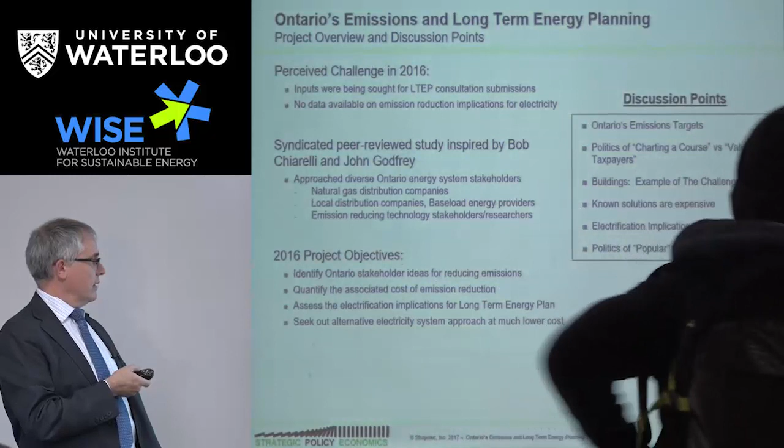The project objectives were to figure out what are the ideas for emission reductions, quantify what that cost would be in order to implement them, how much electricity do you need to actually address them, because there's conversion and fuel switching going on, and then what are the approaches that can be considered for the electricity system design as a whole that would reduce the cost significantly. So that was the objective of the project.

So what I'm going to talk about here is an overview on the emission targets, the politics of what was set out a year or so ago, and then we'll look at a couple of examples on buildings, and also throw some transportation ones in there just to describe why this is hard. Talk about the costs, talk about the electricity, and talk about what is the framework under which they're going to decide all this stuff, which when the LTEP comes out, I hear shortly, we'll know what they did with all these ideas.

Okay. Can everyone hear me? Yeah? A little louder? Okay.

Okay, so the first overview is the emissions challenge. I don't know how many people are up on the climate file, but we have legislated the emission reduction targets in Ontario. So the number I focused on is 37% below 1990 levels by 2030.

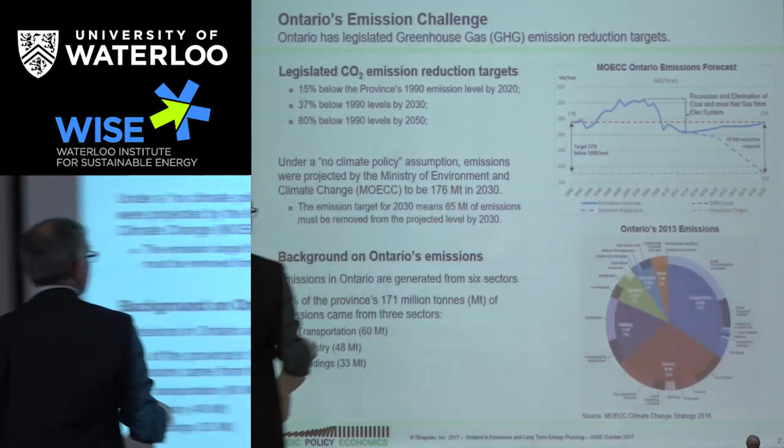The legislated part is important because we actually have to do it, or there'll be issues. So under a no climate policy assumption, that's the top blue line. That's what you get - 176 megatons.

When we look at the composition of emissions in Ontario, there are three main areas that matter - the big pieces of the pie. We've got buildings, which is mostly heating. Then industry, and transportation, which splits into cars and trucks, plus a lot of off-road items as well. So that's the challenge we have to deal with.

There's confusion because the climate guys and the energy guys aren't necessarily talking, and the Ministry of Finance guys weren't talking with them either. We came up with this cap and trade notion - I've labeled it charting a course versus value to taxpayers. Charting a course is important; someone's got to take leadership. We do have a climate problem, you've got to take a step forward. I think it's really good that people are trying to do that stuff, but you've got to keep an eye on the cost.

Why am I talking about this? The Auditor General says you're really just putting up a show that's going to allow you to say you did something. And what does that mean? That came about from the ministry's financial assessment of the cap and trade program.

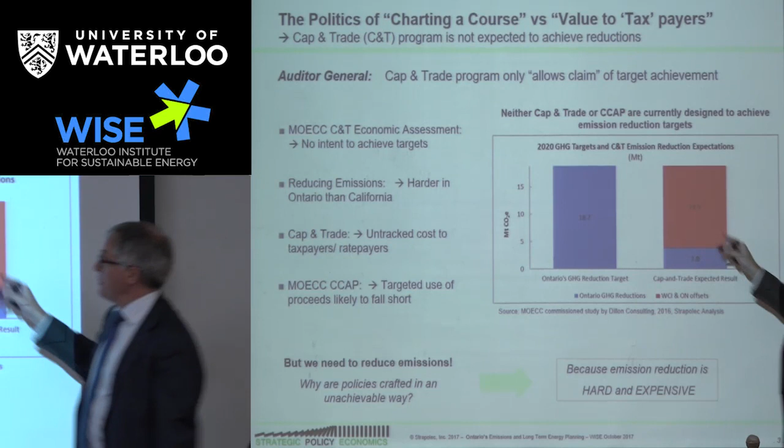We have to get rid of 18 megatons of emissions by 2020. They put the cap and trade program in, and figure we'll actually get 3.8 megatons of emissions out of the programs they're contemplating. The other 14.9 they're going to have to buy from California - so they've already set up that we're just going to send money out of the province. But they want to get started, right? That's why these kinds of comments come about - they're not signing up to actually achieve the changes.

So why would they set this up? The reason is it's really hard and it's really expensive, and when you're a politician you don't like either of those. But they're still taking leadership, which is important for the province.

This is just a list of all the people we consulted or whose material we reviewed in order to get ideas - let's skip on over that. And we'll get into what does 'hard' mean.

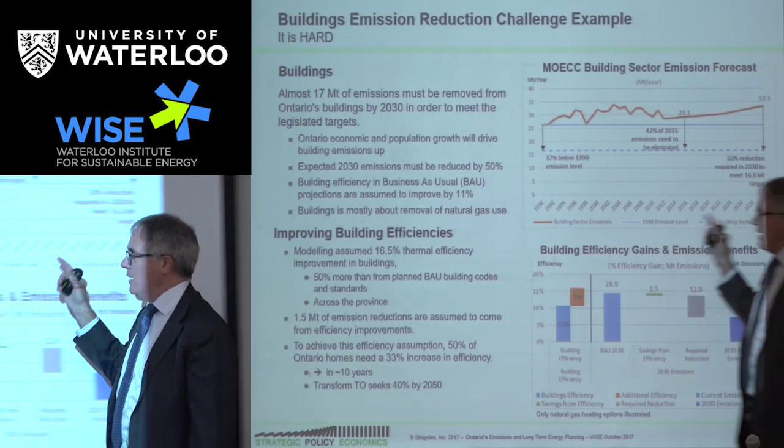When we start talking about hard, buildings is an example. For the building sector, we've got the same idea of growing emissions if we don't do anything. By 2030, that means a 50% reduction of emissions - so 50% of the houses have to lose their emissions, or half the houses have to lose half their emissions, and so on. There's math around that.

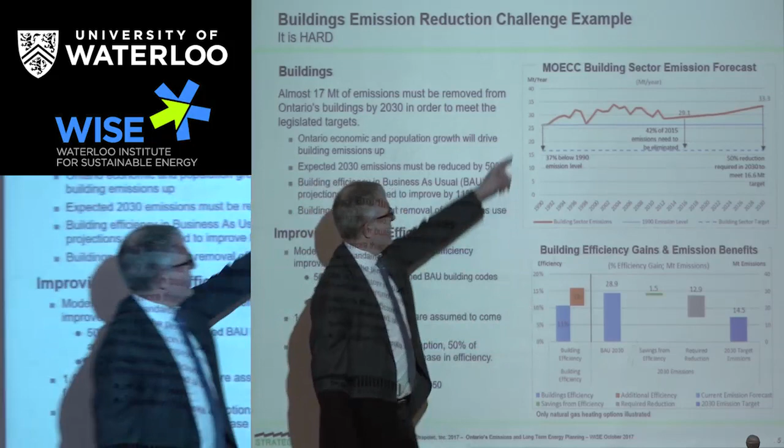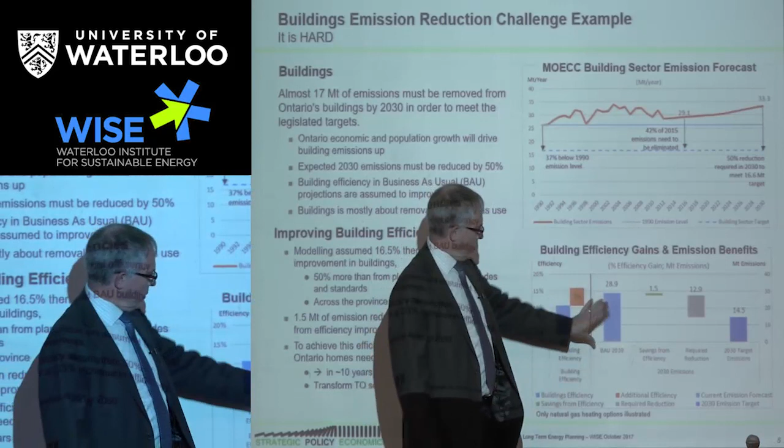Using the technologies and regulations they contemplate, we're left with a number of emissions we have to address. The baseline emissions for 2030 - you take out this little bit because that stuff's already embedded in the forecast - and then we're left with that much emissions we've got to get rid of.

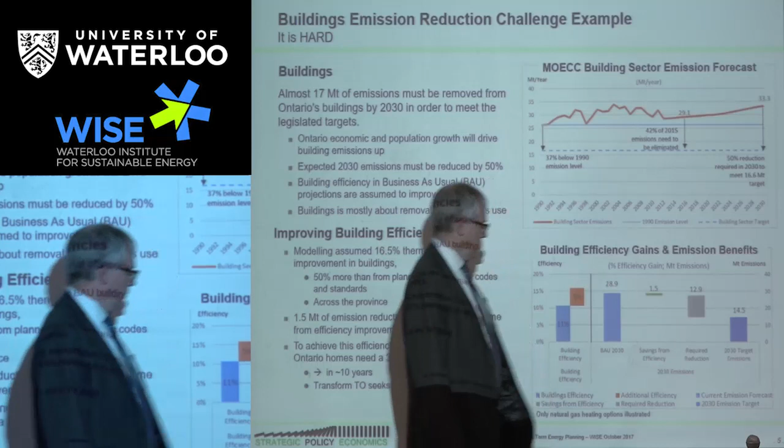To achieve that, we need 50% of the homes to have a 33% increase in efficiency, over 10 years - and that's just to get this sliver. So it's hard to deal with that, and then we're left with those kinds of emissions to come out in the end.

Okay, at a high level, it's expensive. The price tag I put on it is $27 billion per year. To put that in perspective, we've had a lot of commotion in Ontario in the last year or so around the cost of electricity. The dollar figure that has caused all that commotion is $3 billion per year. That's the cost that got increased, the 25% the government just took out, $3 billion. So this is $27 billion per year.

The cost of undertaking climate change by 2030 is not a small number, so we actually want to be kind of smart about it. So how do we frame that up? We've got three different examples.

One, if we assume the $27 billion is the total cost, it's coming out of an assumption of $170 per megawatt hour electricity, which is the average price they're expecting for new generation they'd have to build. We've got two components, which I'm going to go into a little later. One is the cap and trade proceeds are going to be used to offset some cost.

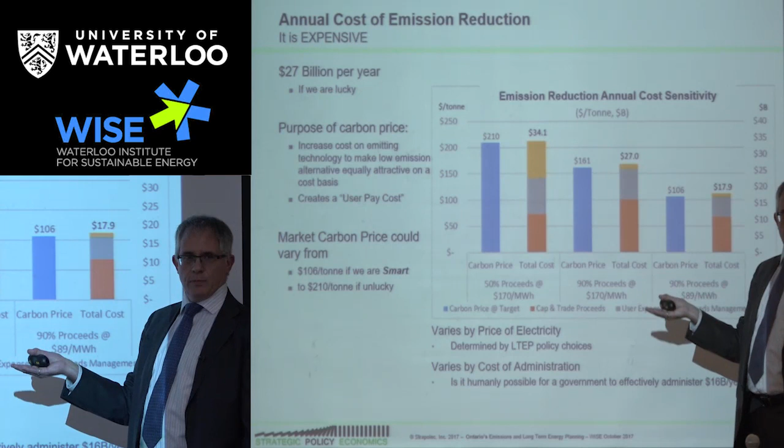And then the users are going to pay whatever the switching costs are that are equal to the carbon price at the time, because this is all around the economics of when does it make sense to switch. It makes sense to switch when you, as a homeowner, decide it's cheaper to get the electric option than it is to continue to burn your natural gas furnace. Then you'll switch, and that can be made economic by a subsidy.

So we've illustrated what happens if you get less electricity costs. This is half price, $89, and that will explain where that came from.

This yellow thing has to do with how good the government is going to be at spending the proceeds, which will be around $16 billion a year in proceeds out of the cap and trade. So how good can the government be at that? I've assumed they'll be at 10% inefficiency.

That's this amount. You could argue that they could mess it up and be 30% inefficient by wasting some of the money or spending it in areas that didn't prove out to be a good idea at the time but then didn't turn out to be helpful. They may choose to use it for other purposes. If they choose to do that, that'll just rack up the cost. So there's a concern around how effective it's even humanly possible for a government to spend that kind of money.

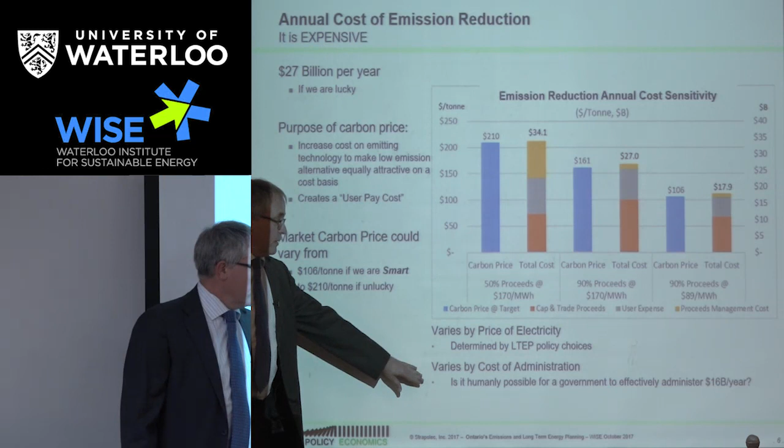So there's the framework.

Okay, so why is it so expensive? It's because there's a lot that has to happen. On residential buildings, which I showed that one example, you've got to get rid of 50% of the emissions by 2030. So 2030 is not a long time—it's almost only 13 years.

Commercial buildings, roughly the same amount needs to come out in terms of percentage. When we get into passenger vehicles, that's an easier problem to solve. Trucks are an extremely difficult problem to solve.

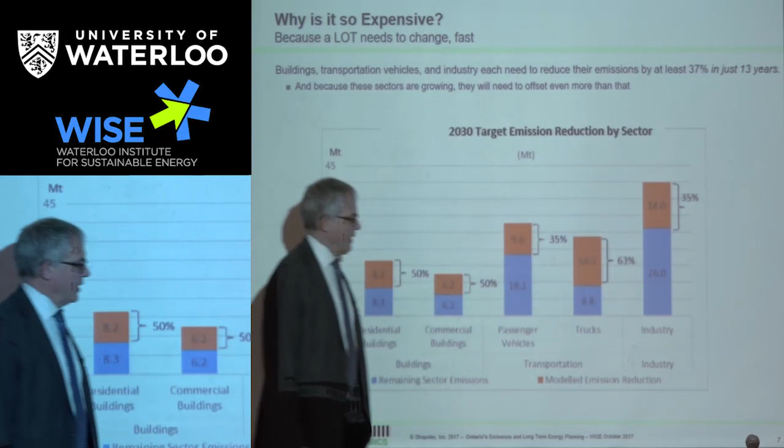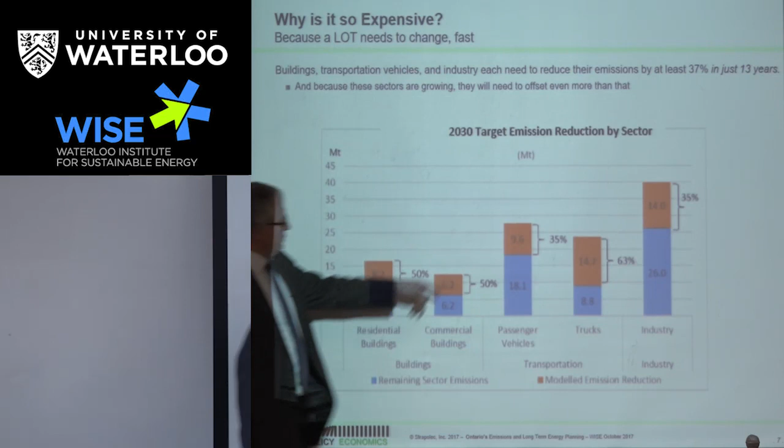And then industry has to get 35% out, and a lot of what we did to get these numbers, we took the 37% target and applied it to each one of those areas. Clearly, do more of this, you have to do less of that, and so on and so forth by the timeframe, okay?

Okay, so on heating, just some examples to back up the cost. We looked at a number of different options, but the three big ones are: get just straight up electricity, use an electric furnace; you can do the air source heat pump, which is more efficient by a factor of 2; or you can use a ground source heat pump, which is more efficient again by a factor of 4. Along with this is the capital costs that go up, but the electricity use goes down.

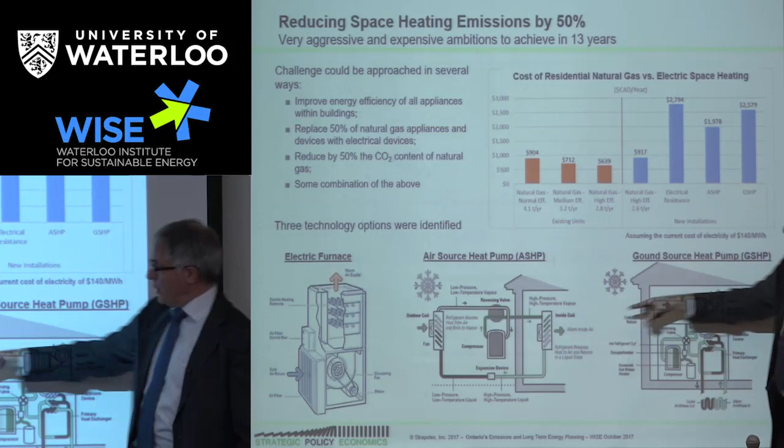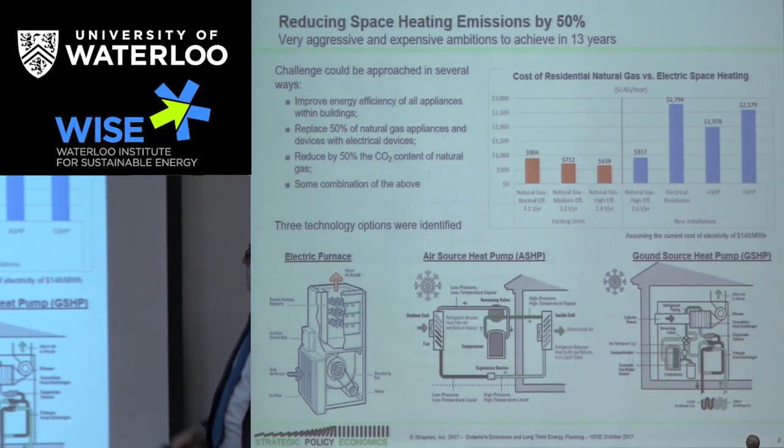The air source heat pump, because it uses less electricity but has more capital cost, will be around $2,000, and the ground source heat pump will be almost the same as the electrical one because these things are really expensive. So they make sense on large buildings, and this might make sense in a small apartment, depending on what you're talking about.

So to figure out the carbon price, you have to look at the difference in cost and the difference in emissions. But you can see it's not cheap to consider fuel switching, which is why there's a little bit of a topic on that. On automobiles, I stole this slide from Toyota.

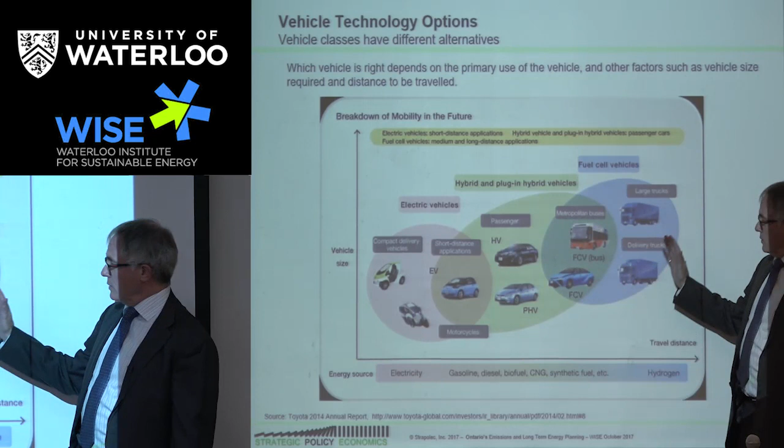In the middle are these plug-in hybrids. So technology is moving these this way, it's moving those that way. Who knows what's going to happen? But there is a framework for looking at when these make sense, and they all have a role. So we looked at all of them.

In terms of transportation, as an example of how hard this problem is, built into the forecast of emissions by 2030, the regulations currently planned are to get 26% more fuel efficiency out of the vehicles. So the emission forecasts already have this built in. I then doubled that efficiency. Similarly with trucks, they already have a 19% regulatory influence built in, so we bumped that up. These are big numbers, right?

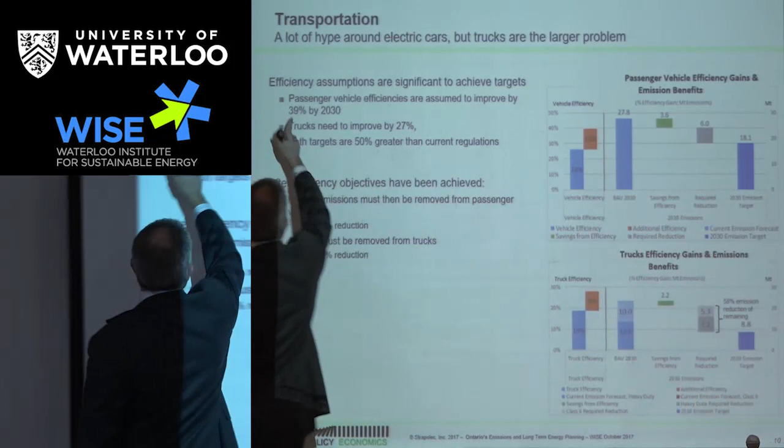So assuming you're going to get 40%, we've assumed you'll get 40% more efficiency out of passenger cars, and 27% more efficiency out of trucks.

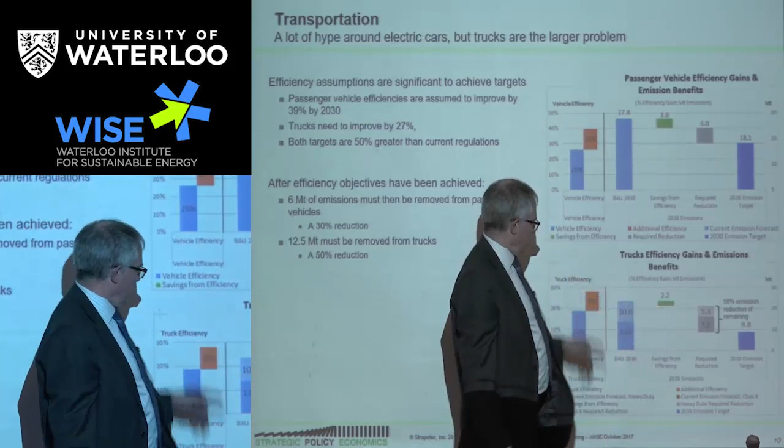After that, we're starting to figure out what our fuel supply options are going to have to do. The green is the benefit of emission reductions from this little bit of efficiency, and then we have those problems in terms of getting the fuel switching notion in play. So they're not small targets.

In terms of computing options, this is an example of heavy-duty short-range trucks. We have diesel trucks that cost this much. This is the method we use to estimate the carbon price. So that's what it costs to run a diesel truck. This little bit is tax.

We're taking that tax away to look at the base costs, because when they move to electricity, they're going to have to figure out how to recover all of that tax they're getting on gasoline. We're just saying that's a different problem. So regular diesel trucks compared to natural gas are almost the same price. Looks like a really cheap option - it's a little bit more. It turns out to be about $53 a ton in CO2 for that sliver of additional cost, and that's because you're not getting rid of very many emissions by shifting to natural gas.

Plug-in hybrids cost a lot more - they end up with a carbon price around $540. A hydrogen truck will have a carbon price of $582. The reason these are different is this one will get rid of more emissions. So you have to factor all of that into play.

And the last one is renewable diesel. The problem with natural gas and renewable diesel is even if they converted the entire fleet, they don't meet targets. So we need some of those, right? And the problem with renewable diesel is there's not enough feedstock, so you run out of bandwidth. The feedstock being fats and biodegradable byproducts. So we kind of have that challenge.

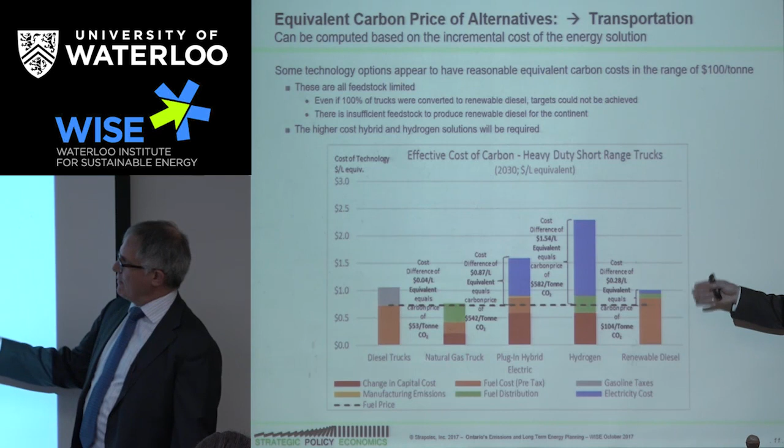So we need to look at that mix in the blend. For the electricity assumption, we assumed we maxed this out and filled in with the rest of the stuff. The reason I mention that is we tried to be conservative on the low end of how much electricity we need.

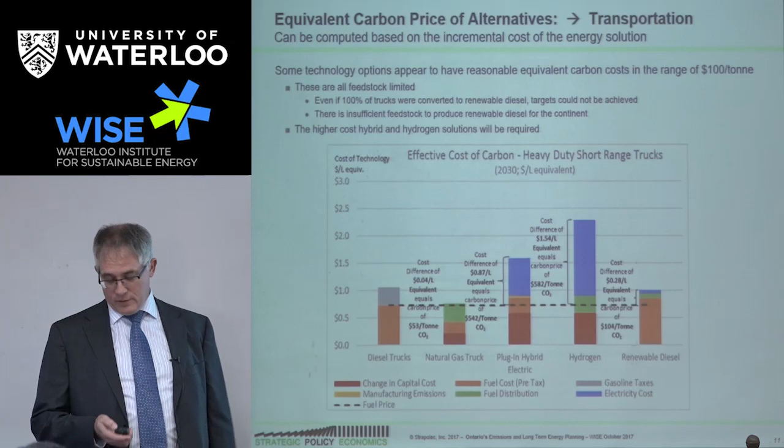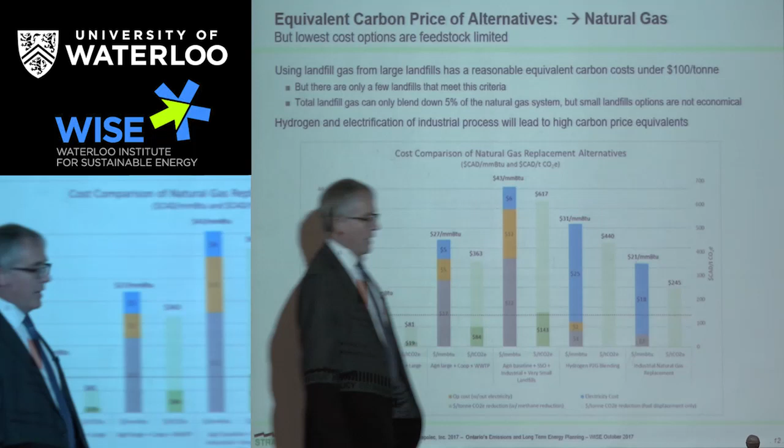Natural gas, I'll go over this quickly. We looked at landfills of different sizes - this is the effective carbon price to take natural gas out of landfills, called renewable natural gas. We also looked at natural gas used to make hydrogen, so there's a carbon price associated with switching natural gas use of hydrogen into electricity use to make hydrogen, and then converting industrial use of natural gas to electricity. We got these different prices, just looking at those kinds of things as well.

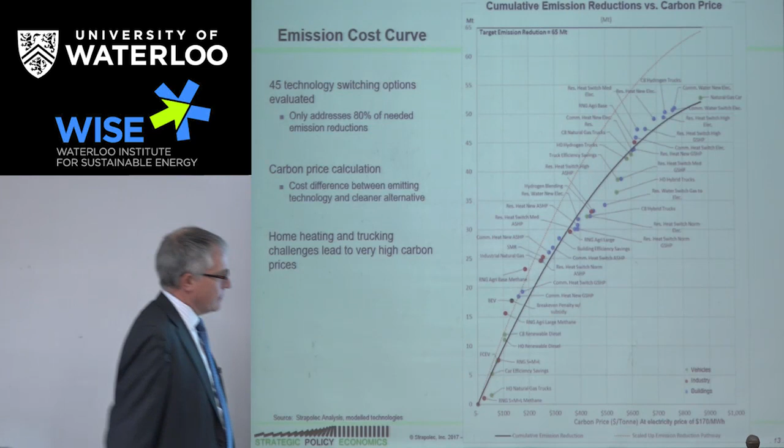So what this curve shows is the effective carbon price across the bottom and how many emissions we can get rid of. We looked at 45 different technologies - those are all the little dots. We have this cost curve that roughly tells you how many emissions we can get out of the system for a given carbon price. This big carbon price is $800 or $900 a ton. So we need to consider, if you just want carbon pricing - because there's debate out there about whether we should just do a carbon tax and leave it alone, do nothing else.

Will that get us where we need to go? It won't, because you'd have to have it up really high. And you don't need to have it up really high. I'll explain that in a minute. But you can see there's a number of different options.

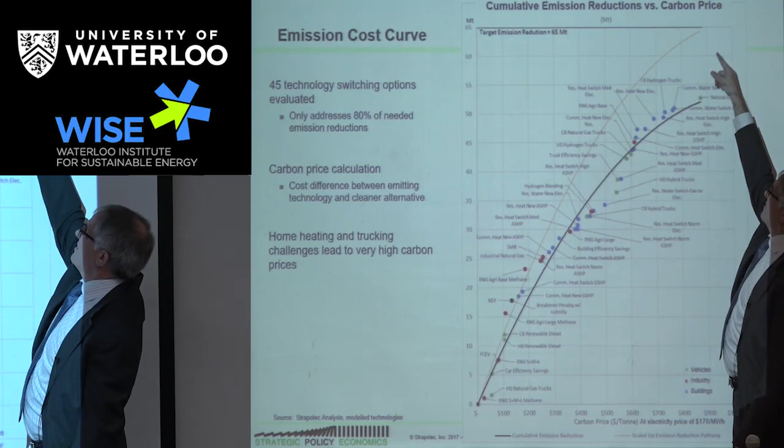Now, in the analysis we did, we quantified the 45. We have to get to the top. So this is an unknown which we didn't assess. We just assume that magic will happen, and we'll get more emissions in proportion to this curve, to solve those unidentified solutions.

Okay, so we've got a mechanism of mapping carbon price to emission reductions. So the economics on this, in terms of the use of the cap and trade proceeds, the notion I mentioned about: you don't actually have to get to an $800 carbon price in order to make the decision to fuel switch economic, and that's because you can subsidize.

And so we have a model that looked at what happens if the carbon price gets to a certain amount, and how that economic decision gets played out inside an individual's brain, whether they should, for example, switch their home furnace. We have two different views on looking at that.

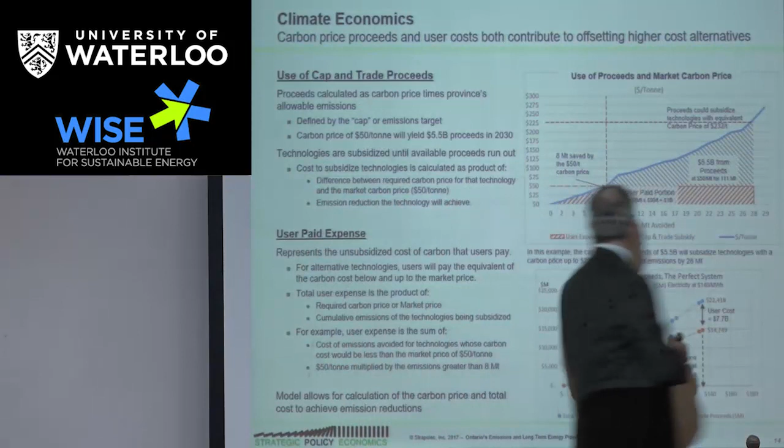So when you set a carbon price, as an example $50 a ton, that means the user will find it economic to switch to that new technology because the existing fossil fuel fired option will be more expensive. So whenever the effective carbon price to switch is below the carbon price in the market, it becomes more economic to just switch, and the user will just pay that cost. It will not need a subsidy.

As soon as the cost to switch is higher than the market price, we assume the user will pay that first portion, and then they'll need a subsidy for the rest. That subsidy needs to come from the cap and trade proceeds. At $50, that amount would be $5.5 billion.

At $50, at 111 megatons, that's the target for 2030. So they have this $5.5 billion, and they can use that to subsidize. What that means is anything with less than a $230 per ton carbon switching price, they can pay for. Anything above that, they can't.

So to get the math, you need a higher carbon price to shift this up and extend that volume over in order to cover everything. And so we modeled that down here.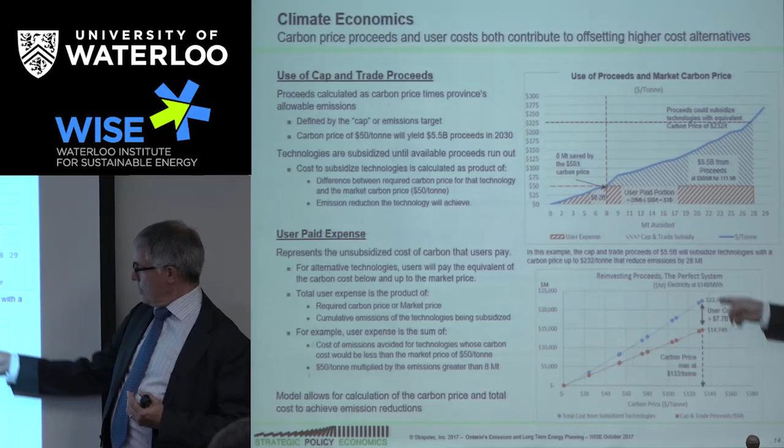The example is to get to the 2030 targets, you'll need roughly $133 per ton carbon price, $14 billion per year in proceeds, and the users will pay another seven to eight, for a total cost of 22.4, assuming electricity at $140 a megawatt hour, which is the average in the province today. That's kind of how the model works in terms of the two components.

So we set out to look at electricity, and the question is, how much does electricity matter in the fuel switching, in terms of getting rid of emissions? So when we put all those 45 options together, and we looked at heating, transport, and industry—heating being the buildings—the blue is electricity.

So electricity figures in greatly into the cost of heating. If you can knock the cost of electricity down, you're going to knock the cost of converting the heating to electricity. Transport too—that blue is more than half the cost—and same with industry.

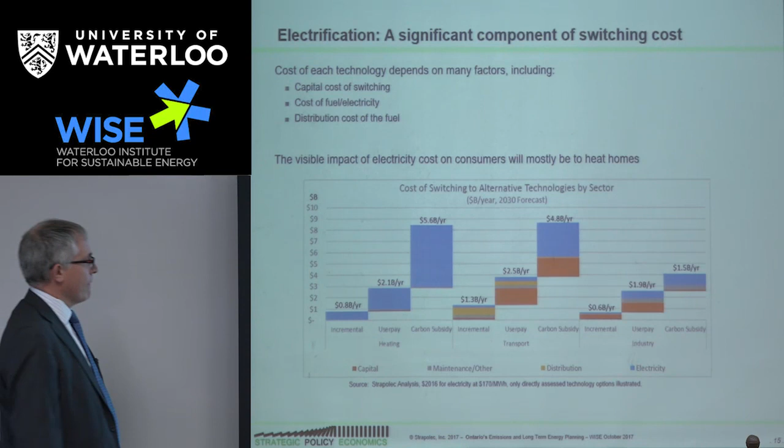The structure in terms of the blocks is that user pay I mentioned about is this part. The price that requires a subsidy from the cap and trade proceeds would be this, and this is just increasing costs from today because we're trying to illustrate what's going to happen in 2030. That's made up of the price of natural gas going up, the price of gasoline going up, the price of a variety of things going up, and that's just cost absorbed by the users. So electricity is a big deal.

So this brings us to the notion of electricity. Not all new electricity demand is the same. The biggest thing is that home heating is a winter thing.

I threw up an example of what's going on in Quebec, because Quebec uses electricity for home heating. The red line is Ontario's average energy consumption through the year, the blue is Quebec's. You can see what happens when a province wants to heat itself with electricity, demand gets really big in the winter. So we need new supplies that will do that. That's the challenge of what we need to have.

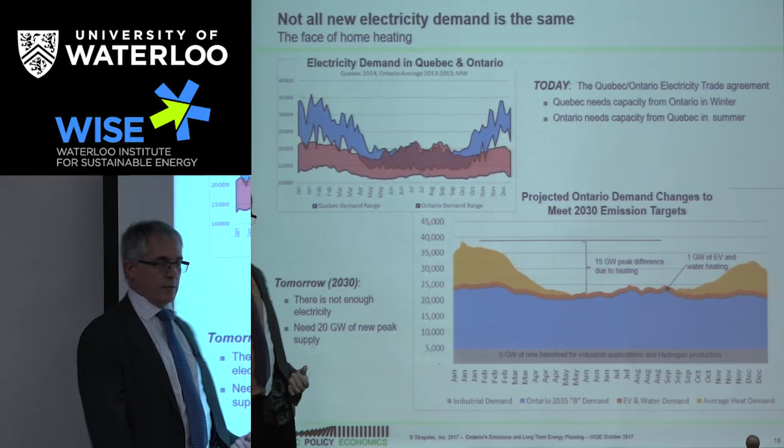Specifically in Ontario, the blue is the electricity demand today. The gray is the flat load industrial applications that will just increase base load demand. The orange is electric vehicles and water heating, which stays roughly the same all year long. And the yellow is the forecast need for heat load, assuming ground source heat pumps, air source heat pumps, and electric heating, the mix that we put in. So, a big change from today to tomorrow.

How big is that change? There's a couple of perspectives. The IESO in their planning outlook a year ago came out with a forecast, two scenarios. They had the outlook D, which is their expectation of how much electricity they said they're going to need for achieving the emission targets.

But they didn't actually analyze it to see if they would achieve emission targets. They just created a scenario that if we did a bunch of stuff, we'd get somewhere, and our analysis says it'll only get halfway to the emission targets. So the environmental commissioner looked at the stories and results from the analysis the Ontario government had done. Outlook D was this yellow line in terms of how many emissions they can get rid of. They've got to get down here. That's a gap, the same gap we have over here.

There's a lot of confidence that the electricity system is undersized. Since then, speaking with IESO, they've all agreed this is really the curve you need if you want to hit the targets. Problem is, the amount of electricity you have to build to hit that target is here, and that's by 2030. There's just no way, it is not humanly possible to build 90 terawatt hours of electricity in 5 years. So we can't do it. It can't be done.

And where does that matter? It matters if you care about cap and trade, because it means we are signed up to buy emission credits from outside the province until we can actually produce enough electricity. So from a policy perspective, we signed up to something very expensive because we legislated the emission targets.

So now we're looking at, what are they thinking about when it comes to our electricity solution? I've labeled it popular politics versus looking at the generational cost to Ontarians for 20 or 30 years. The popular solution, you hear it in the hype, you've heard it before: lots of hydro imports from Quebec, lots of wind technology being scattered about. Part of the problem is building hydro in Ontario is it can only go way up north.

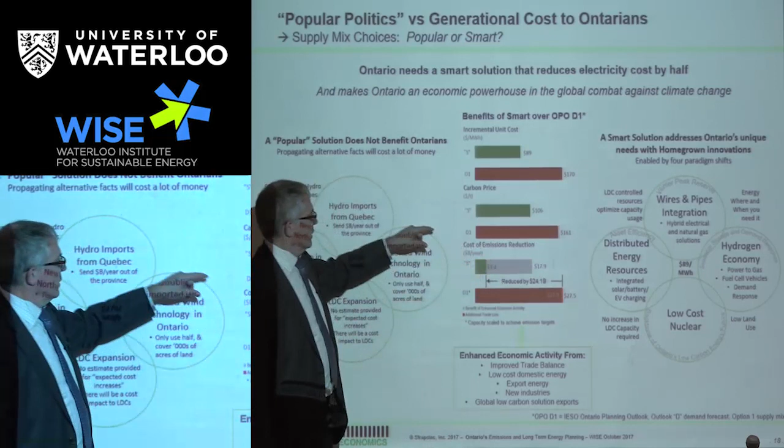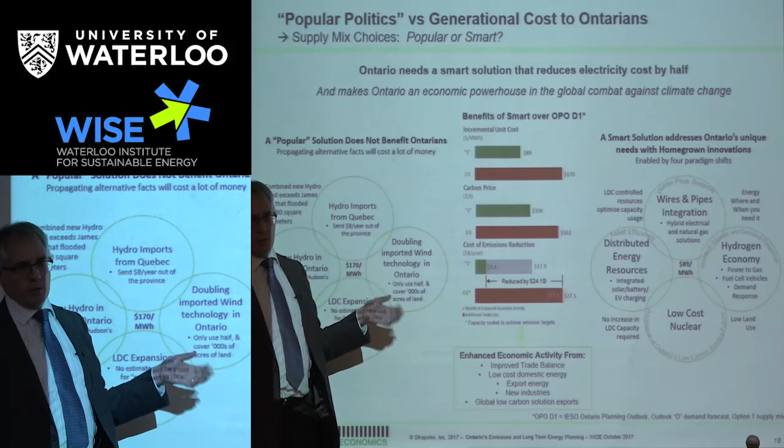And then there's low-cost nuclear, which is a big contentious subject, but that was what the findings were. What we discovered, if we're smart about it - that's the label I put on it - is you can have the incremental unit cost of electricity at $89 coming out of here versus $170 coming out of there. That's the government's number, the 89 is ours. The carbon price would be $106 instead of $160 per ton. And the biggest kicker is if we do a lot of this stuff smartly, we'll have made-in-Ontario exportable industries getting created, and those jobs and all that stuff will actually bring the cost of reducing emissions from $27 billion a year, that's the number I started with, down to around $3 billion. So if we're smart about it, we can actually do this climate thing smartly, and it'll be an economic boon to the province. So that's the general framework.

In looking at why that low electricity cost comes into play, I've got two pictures. One is a mock-up of the supply mix that the IESO put out a year ago in terms of what they felt would achieve it. This red line is their forecast of demand, which has that winter heating in it. All these little spikes - you guys know what those are? Anybody? What are those spikes in the annual supply of electricity? That's the wind, going up and down, being very intermittent, happening all year long. And anything above that red line can't be used, right? That's not usable until they figure out how to use that. The important thing is it's a big number compared to that. And then this gray stuff, which you can barely see, that's imports from Quebec.

Okay, but you have a very messy system. It's very inefficient. The use of wind is only 50% - it can only get used, so that means the wind cost is twice the sticker price because you can throw half of it away.

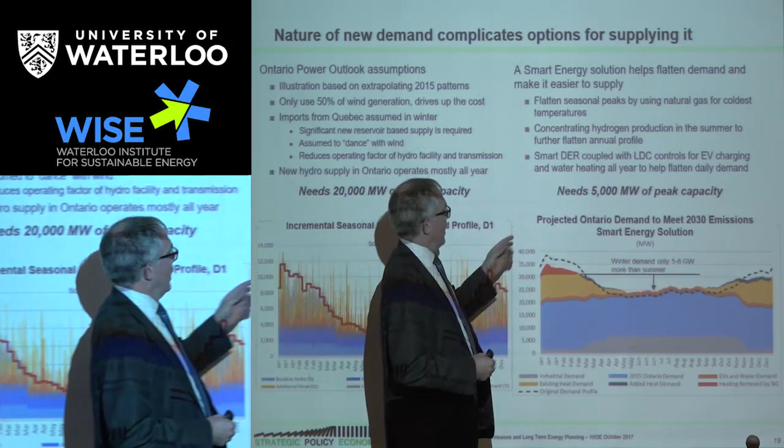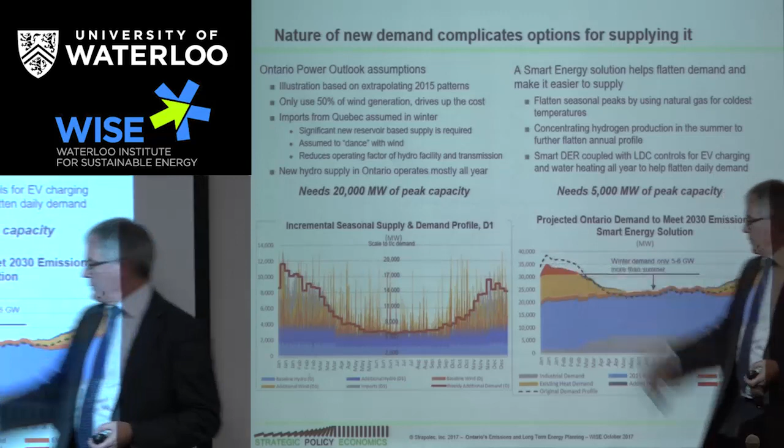When we look at it on the other side, one last thing: there's a 20,000 megawatt additional capacity that's required to solve this problem. On this side of the fence, when we look at those options - if you use hydrogen, that battery storage you mentioned, it can also be a demand response system at the same time. And you can actually produce a lot of it in the summer, store it in the natural gas caverns that we have - that's integrating the wires and pipes. And so you can reduce the production in the winter, which actually works, which brings the demand down. That's what brings it down from this dotted forecast peak to the top of the red. And then if we do hybrid home heating devices, you can get rid of the red part, so your peak demand becomes there. And you end up with only a 5 to 6 peak difference between winter and summer. That's a manageable amount, and then the whole load gets smoothed out from the solar battery backups.

So it changes the way the system behaves. That flattening of demand means you don't need to increase the local distribution company assets, because this can be dealt with within their existing capabilities. So free distribution costs till 2030.

So I'm going to just go over a few slides to talk about the different features of the different energy supplies and the considerations that have to come into play.

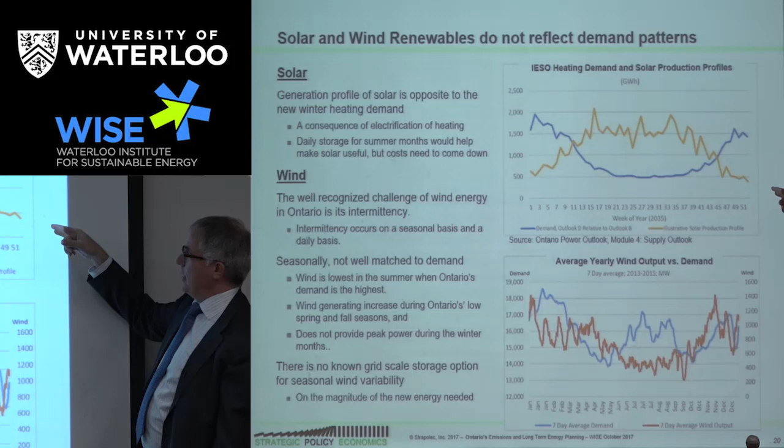So the first thing, and this is the obvious one, the IESO put this chart out. This is solar - it shines in the winter, shines in the summer more than in the winter. That's just what happens. That blue line is our demand. So solar is kind of a problem in terms of looking at it in this latitude of Ontario, trying to get it to solve our problem. It can't solve the winter thing. In the summer it can, but it can't solve it in the winter.

Wind - we showed all that daily spiking on the previous chart. It also has a profile that's on average lower in the summer. It still peaks in the summer, but on average lower in the summer, goes up in the fall, goes up in the spring, flattens out in the winter. Not ideally matched to this blue line, which is the demand. You could argue this could balance with that, but you still have this huge problem in the winter in terms of offsetting the two, right?

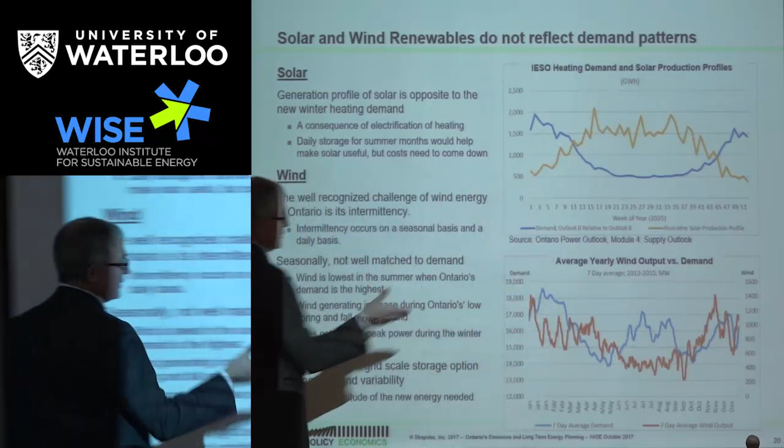So there's challenges in that Mother Nature is not delivering this kind of energy in a manner that we want to use it. And so that's where the whole concept of storage comes into play. We have storage that can help make solar useful. The wind problem on this scale is not yet solved, right? And the ideas people bandy about is, for example, compressed air storage, pumped water storage. There's all sorts of things that people are looking at, and we'll get to what does the scale mean in a second.

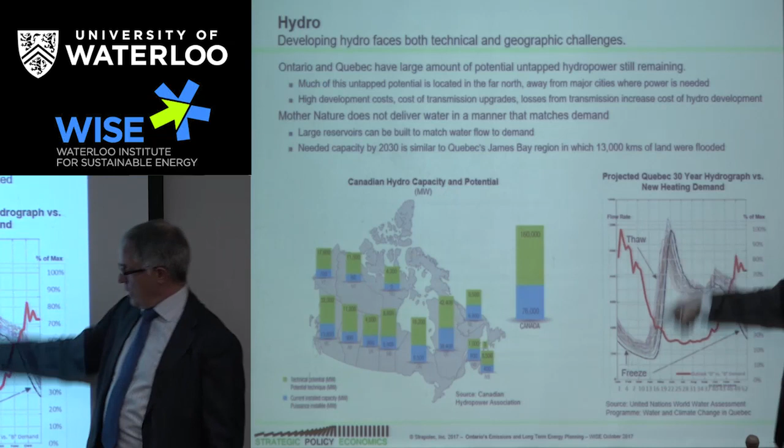So hydro's got a similar problem. Again, it's a Mother Nature thing. We've got lots of hydro capacity across the country. It is all north, mostly. The problem with hydro capacity, particularly in the north, is winter happens, and so the water doesn't really flow in the winter as much. It can flow a lot in the spring, and then it tapers off. And in order to make that water profile look like our demand, which is this red thing, you have to build dams.

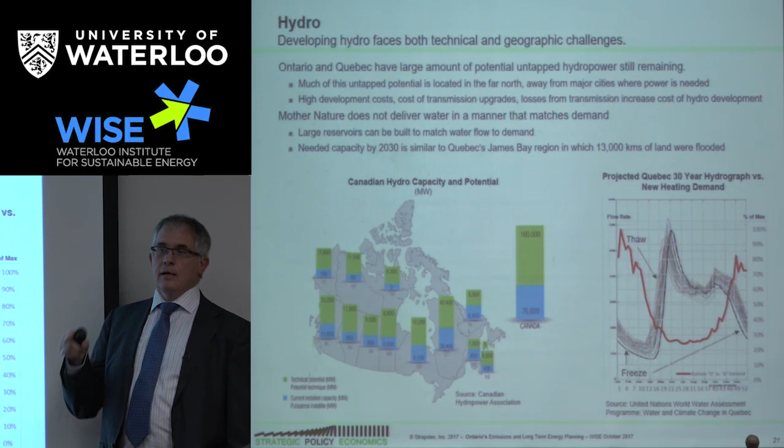Quebec did it by building James Bay. To meet our 2030 targets, we need another James Bay. That's how much we need. So if you want to talk about pumped storage, okay, we need pumped storage that covers 13,000 square kilometers of land. Then we'll be there. It's big numbers. This is the essential challenge in terms of looking at all these options.

Okay, switching to the new ideas. I mentioned solar battery, and that's, you take the solar on the house, you plug in a battery, you let it get controlled by a local distribution company, so it can do the microgrid thing. And basically the big advantage of that is you can use solar and battery to shave peaks. Why does that matter? That means you can get rid of your peaking gas plants, one. Two, if you shave the peak, you're going to inhibit the need to build a distribution network up, because you can shave the peak and keep it local, right?

And so what this picture shows is, in July, when the sun shines, it will create this bandwidth of solar energy. The yellow part it would use directly. The orange would be plugged into a battery. The battery then discharges when the sun goes down to meet the demand profile that is typical of an Ontario household, right? So in this way, you end up flattening from this thing down to this bottom the demand on the local distribution system. So you apply that on a mass scale, and you're doing a lot of peak shaving that will flatten significantly the load. That can happen.

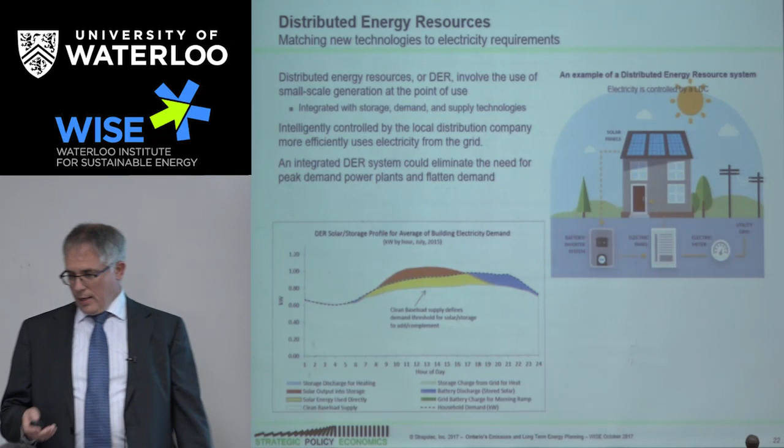The white line that we use as the target, by the way, is what our baseload system in Ontario can currently do, right? So we just said, well, how much solar do you need to bring it down to what Niagara Falls will do, for example? And so that's that idea.

Integrating wires and pipes. The one thing I am showing here is they have hybrid systems where you have a heat pump, and then you can have a natural gas furnace combined with it. You turn on the gas. The thing about heat pumps is when it gets really cold, they don't work so well. And so you've got some challenges. And when they get really cold and not working so well, you're actually drawing a lot more electricity to make it do its thing. They become less efficient.

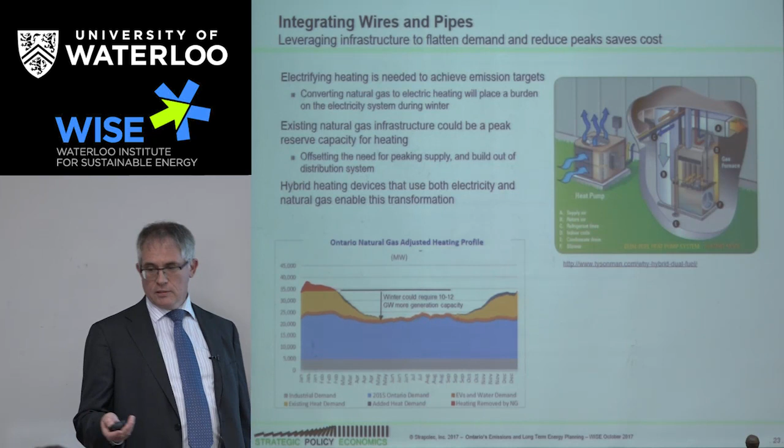So if you want to manage the whole thing effectively without causing cost to the distribution system, stick in natural gas. We already got the natural gas pipes. Use it sporadically to get rid of the peaks, and that's how you can get rid of that amount of electricity by doing the natural gas. The other thing it does is you'd have to install more devices to get rid of the emissions, which allows all this red stuff to get distributed throughout the year, which has another effect of flattening the demand load on the system, which impacts on how much capacity you have to have in your system. So there's a number of electricity system savings that occur by doing those hybrids.

It also provides an energy storage system if you pump it into our natural gas caverns. Currently in Ontario, they fill up the caverns with natural gas during the spring, summer and fall, then pump it out in the winter to supply our needs. So just use hydrogen instead of natural gas, and you get that seasonal benefit of production, which smooths out the seasonal load profile.

Nuclear - one little known fact, because people say nuclear isn't very flexible. This blue line is the demand we've had in Ontario for the last 5 years, and the green is the production from our nuclear plants. The reason they can track this reasonably well is because nuclear plants have an annual maintenance cycle, and they figure out when to turn each unit down, taking it offline at times of expected low demand. So they can actually manage that well.

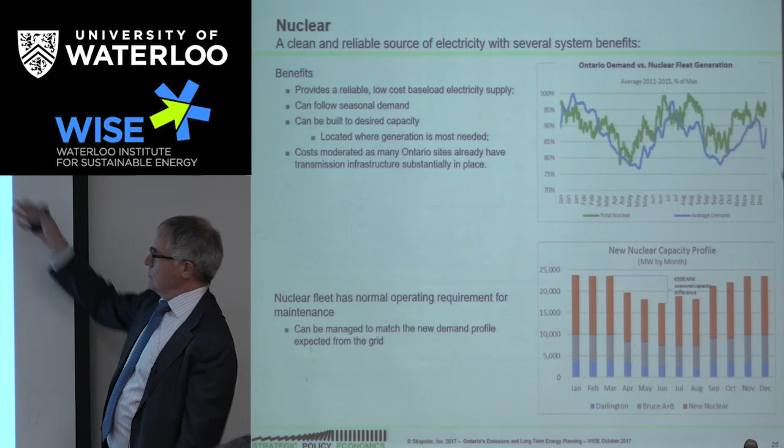So we started looking at new capacities. If you brought nuclear in, you could apply the same logic and get a profile that can be optimized for new nuclear that starts to reflect that winter peak we showed earlier. So we've got this baseload option that could supply that function and avoid a number of other costs associated with gas plants. Those are the big paradigms.

So the very quick summary: we want to avoid $27 billion a year, because that's the cost of doing all this. If we're smart about it with these different options - hydrogen, LDC control, low-cost nuclear, hybrid heating - we can get somewhere.

We know we can't achieve the electrification on time, and if people want to go the mass hydro route, the question that's going to become part of the dialogue is: we need a lot of electricity, we have a lot of hydro potential, but when do you think we'll flood 10,000 square kilometers of land in Ontario to build that hydro? I think it's going to be really hard to get social acceptance on that problem.

So we have a problem, it has to get dealt with. I think we're going to be looking at: do I want to flood, do I hate nuclear more? Because will the storage for wind show up in 10 years? Big question. These are going to be difficult social decisions that need to be made.

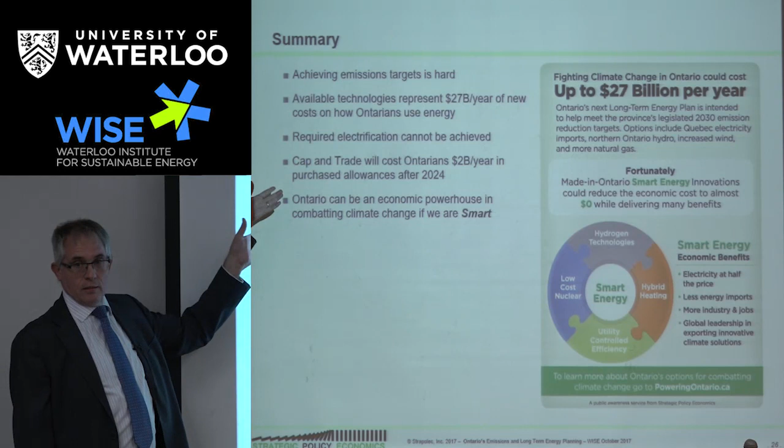Cap and trade will cost us $2 billion a year after 2024, because we're not going to hit the targets since we won't build the electricity in time. I mention 2024 because the Pickering nuclear reactor is going to turn off by then, so we're going to lose a lot of capacity. As soon as that happens, we've got a tougher emissions challenge. But if we're smart, we can become an economic powerhouse.

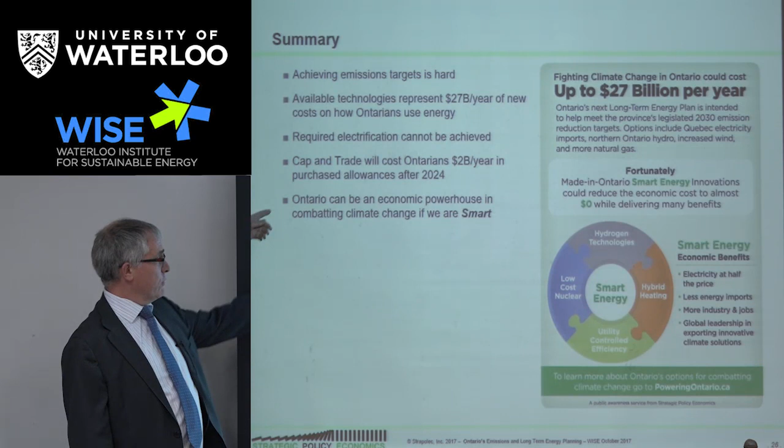There you go, really fast. Okay, so, questions on any or all of it? I'm going to start at the back.

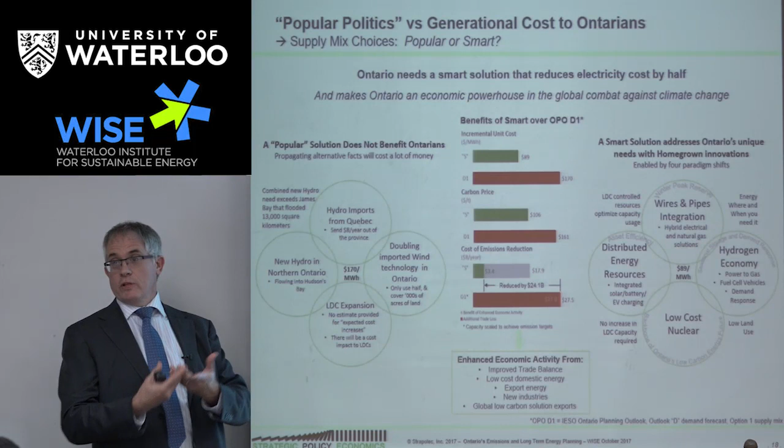Okay, so the assumptions we used in creating this scenario are the assumptions provided by the IESO in their Ontario Planning Outlook, published last September to inform Ontarians during the consultation for the long-term energy plan. That was the scenario they had mocked up - those are the electricity components that come out of it. Going from memory, they had roughly 2,000 or 4,000 megawatts of hydro in 2 phases, 6,000 or 7,000 megawatts of wind plus another 4,000, so another 10,000 megawatts of wind. That's doubling what we expect to have by 2025 - they want to double it again.

And then they assumed about 6,000 megawatts of hydro from Quebec in the winter, plus the transmission needed to build and connect all that. One of the things about the other option is there's no transmission cost to speak of, because the assets already exist everywhere. Unless you build a new dam, you don't need a new transmission system. So does that answer your question?

On this side of the fence, in terms of the supply mix, most of the supply is coming from nuclear, because we contrived this scenario that way. The reason is when we did the research on what they expect the costs of all these different supplies to be by 2030 - solar, wind, whatever those projected costs come down to - the nuclear one came out to like $86 after you take the risk elements out. And we can take the risk elements out, because if you're going to build 20, you might screw up on the first one, but you're not going to screw up on the 20th.

So we just built all nuclear, got rid of all the wind, let it retire, kept the solar because it's useful with batteries, and didn't rely on imports from Quebec - used a natural gas system instead. That's where the philosophy around this scenario comes from, that got the cost down, because we were just trying to ask: is there something that would be cheaper than this? That was the question. So there's a scenario. Does that answer your question?

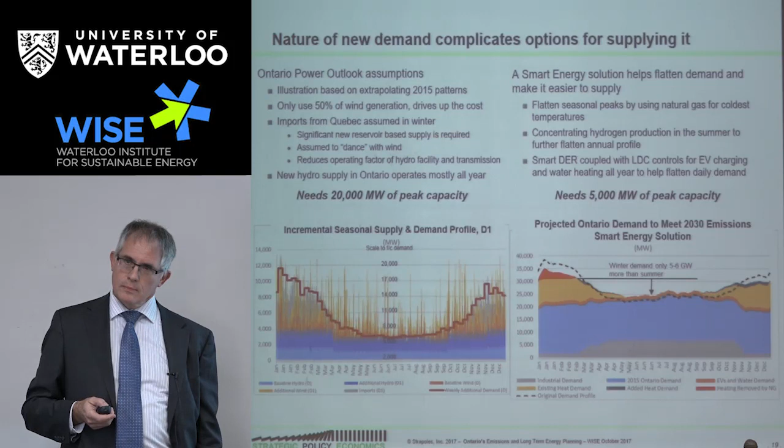If you look at the OBC now and how we're increasing efficiencies and building more airtight construction, and therefore reducing leakage, we're going to be using a lot less gas, and we'll be shifting instead of a winter peak to more of a summer peak to supplant the electrical load.

On the efficiency side, that's where conservation comes into a number of different things. One is reducing the load. So what does the forecast demand have to do? We used the profile of demand that IESO used, and in that profile of demand going into the future, absent climate change, they've already built in a bunch of assumptions around conservation on the electrical side.

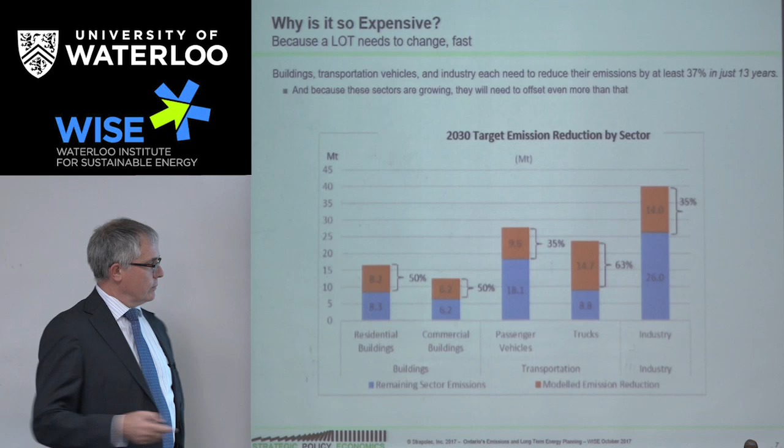What about on the gas side? On the gas side, we did not dig into that - we dug into that in terms of the analogies. On the gas side, we looked at the building. So when we start talking about building efficiency being improved, that has to do with heat loss. That's whether it's electrical or natural gas, doesn't really matter - the buildings are getting tighter. What that came out to was 50% of the homes getting 33% more efficient.

Half the province has got to get that much better - it felt like a big, scary target. So we felt that was a big enough assumption. That's the only way we dealt with conservation. We did not go further into new conservation principles in this study, on the basis that there were a lot of assumptions in the forecast demand that already had conservation principles baked in. We just assumed we'll do some magic, right?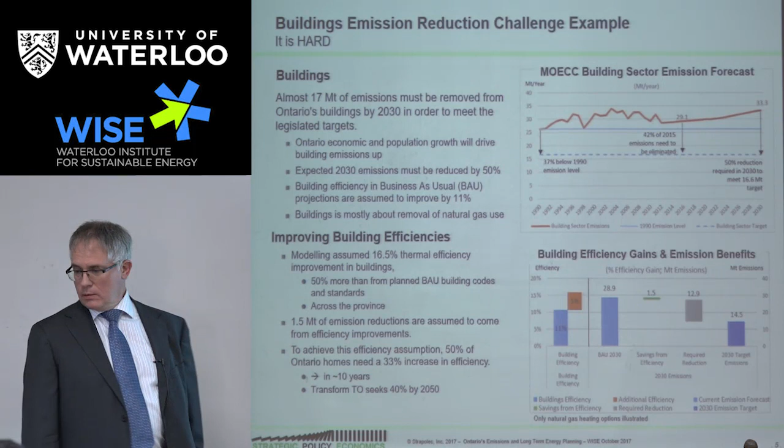Just want a quick recap - you presented all these different sources of energy, and how realistic is it, how realistic is the 2030 deadline? Like, if you presented graphs which show it's almost physically impossible to reach that, whether it's legislation or not, it seems like a plan set up for failure if you want to go to 2030, and it's just so difficult.

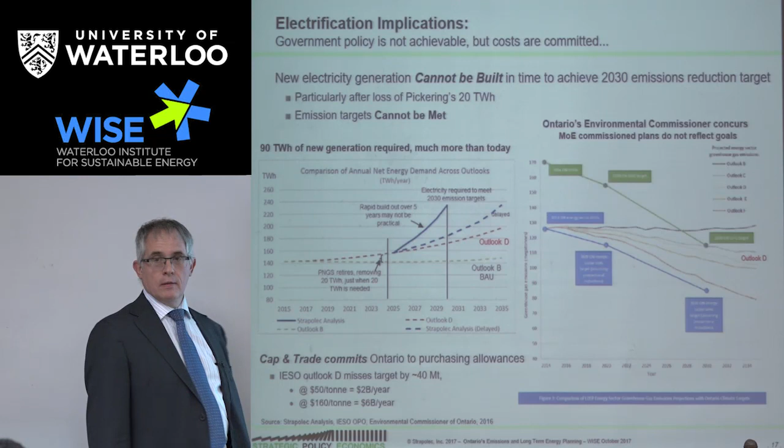Yeah, this is the exact slide I was thinking of. So, what about pushing the deadline further than 2030? How set in stone is that date? Right - so, fact: can't do it. That's a fact. Everyone - they can't meet our targets.

It's just not humanly possible because you can't build the energy options in time. And that's understood by the analysis. The environmental commissioner came out with the same answer, said you're going to miss your target by a whole whack with the plans that have been put forward, which include an electricity plan as well as a fuels study. So you can't do it.

So they have two options. One, slip the targets, buy some time. Because if they don't, the other option is continue to buy emission credits from other jurisdictions.

The thing about the US and their ambitions to meet 2030 targets, once Trump moves on and they get serious about it again, they've got an easy job for the first big chunk because they use a lot of coal and have for a long time. So it's really easy to get rid of coal and replace it with a natural gas plant. They're not hard to build up. So they're going to have emission credits for quite some time. They're going to be beating their targets for quite some time. So we will be buying from them.

And they've already forecast that it's $2 billion, or $500 million a year by 2020, is what we will be spending on California credits already. And I forecast that to grow to $6 billion a year by 2030 because we're not going to hit the targets.

Yeah, so I mentioned that we did not look at rail and aircraft in this study. That's part of the other things that we didn't look at. When we consider how much of the problem that is, rail is this little sliver and aircraft is that larger sliver. So they're important, but as far as our emissions go, they're not the big driver.

In terms of addressing the rail problem, you've probably heard in the news about the GO trains, right? They're talking about hydrogen trains, which is a great idea because there's a company in Ontario that's kind of building the stuff. They're selling it to Germany. That might be something that works out for Ontario in terms of a competitive advantage. So rail they can address with hydrogen.

For big ships and aircraft, that's a challenge, and the tractor trailers, the large ones. Sorry, I was referring to conversion—see if you can do more popular routes, conversion from truck transportation to rail, more freight, or combinations.

Yeah, so my understanding is that there's a study, I think it's the government of Quebec that's sponsoring it, to look at how to move shipment of goods through different mechanisms so that you can optimize. And one of them was rail, which is easier to electrify, to get the goods off the trucks. So people are looking at that stuff, absolutely.

More questions? I want to provoke a question. So I said a lot of stuff here. Some of it must be inconsistent with some of your views. So, like I said, nuclear—anybody talk about nuclear? I said get rid of the wind. Anybody want to talk about that?

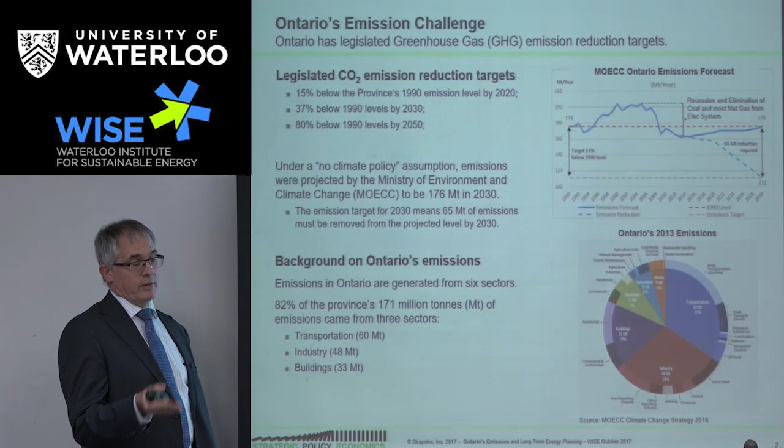For hydrogen fuel cell versus battery electric cars, there is a trade-off, and that was brought out relatively well by that chart from Toyota that says, depending on how far you want to go and how big your application is, fuel cells might be what you want to consider. At the moment I will not buy an electric vehicle because I have a cottage 300 kilometers away and there's nothing there, so I need a 600-kilometer range. So when they make one, I'll get one. Until then, I might get a hybrid because they're a good idea, or I might get a fuel cell vehicle, but they don't have the range yet either. So those are the consumer behaviors that impact on these things.

What about the opportunities with RNG, renewable natural gas? So the waste incineration...

Waste incineration to produce electricity, or to produce hydrogen. In terms of extracting hydrogen from methane, whether it's natural gas methane or taken from a landfill site, if you're extracting hydrogen from it, you're still producing CO2. It's also an expensive process because you have to throw electricity into the mix to make the hydrogen. We looked at that lightly, and it became apparent very quickly that it was really expensive, not ready for prime time. So for our costing assumptions on what could be done by 2030, it didn't make the cut.

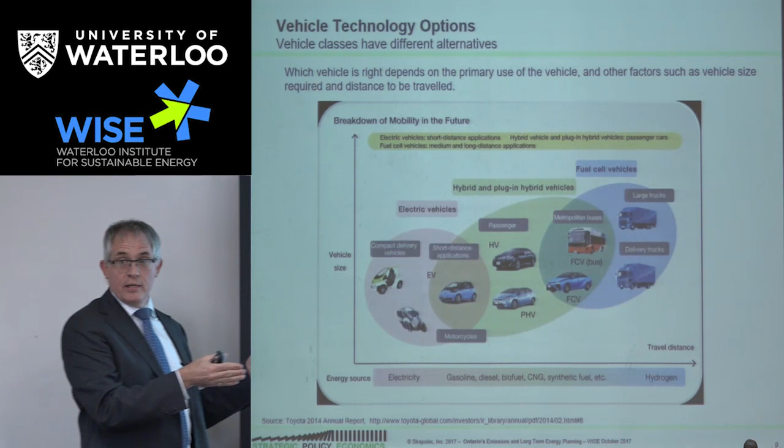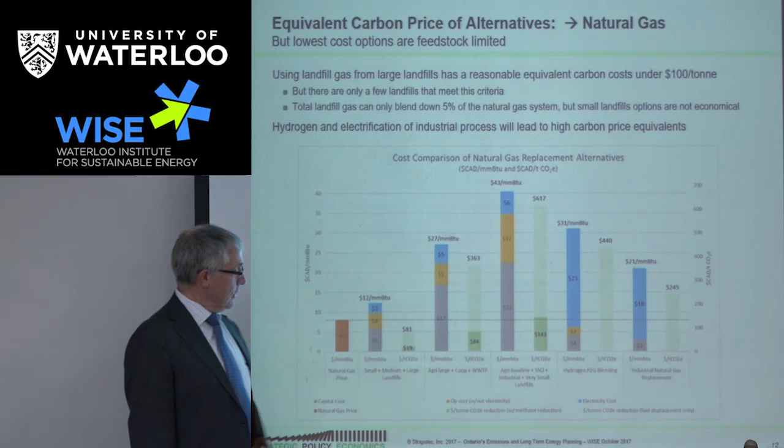There's a couple things around that, which I'll get into. So here we looked at getting all the methane out of landfills. If you just capture the methane, that's the little green at the bottom, because the methane's coming out of landfills. Capturing that methane and not releasing it, if you just burn it, is better than letting it into the atmosphere. Capturing it for whatever purpose would cost only this much in the carbon price. To convert that into methane you can pump into the natural gas system, that's the renewable natural gas option from landfills, it costs a little bit more. There's other things you have to do. Large landfills, great idea. As soon as you get into the small landfills, and there's a lot more of those, it becomes very expensive to use that renewable natural gas.

There's also the synthetic gas option, which has that whole methanation process of taking hydrogen, combining it with carbon dioxide, and producing artificial methane. Again, that seems like a backwards kind of process because you've got to get the hydrogen in the first place, so why don't you just stick with the hydrogen? There's a number of funny things, and those haven't been costed out in any meaningful way by anybody yet. That's where that magic comes in, because those are all good ideas. We didn't use them because we couldn't get cost data in our study. It wasn't a judgment, we just had no data, so we didn't use them.

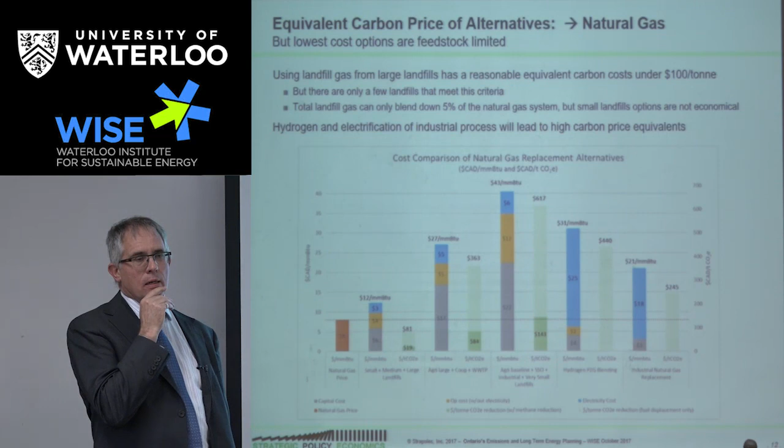Like you say, in terms of transportation, there will be a shortage of electricity in 2040. In 2024 in Ontario, we're turning off 6 nuclear plants. Question: is there any consideration to meet that short-term target of transforming vehicles to LNG or LPG in Ontario?

There's a lot of talk around natural gas vehicles, particularly for trucks, and the Natural Gas Vehicle Association of Ontario is lobbying. I do believe the provincial government is allocating funding for those kinds of notions, because natural gas as a bridge is helpful, and natural gas trucks are better than diesel trucks, and they can build them. It costs a little bit more.

And so they should be pursuing it, and people are pushing for that for their own businesses. So those are all good ideas. But even if you replace the entire fleet with natural gas, you don't meet targets. So it's not the answer, right?

But it can get you somewhere, right? It's only for the trucks, right? No, they're talking about cars and trucks and boats and ships, but not planes. There's a lot of options for natural gas, and they're all legitimate, and they all have a role and a benefit.

You add them all up, they don't get us there. If they're the only thing we do, we don't get the targets. So we need them because they're good and they can happen fast, right? And for trucking, there's not too many other options.

So Mark, is it correct to say that after 2024 we will be using more natural gas for electricity generation rather than optimizing other sources of generation? I don't know about the 'rather than optimizing.' We're waiting for the long-term energy plan to answer that question. But at the moment, there will be more natural gas used. It's a given, right?

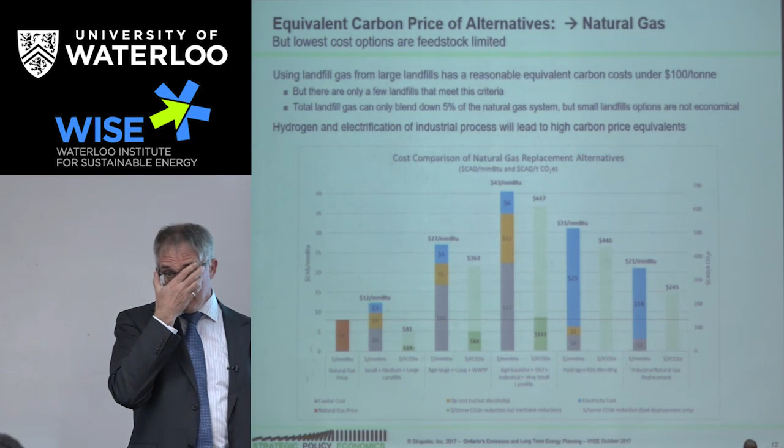Absent something we haven't heard of yet. We have one more question. So now, given that those 6 plants are shutting down, in your opinion, is the province going in the right direction when it comes to the supply mix and the way its technologies are developed? If you had a say, what would you do to move the energy supply in an ideal direction?

Okay, so on the supply mix side, because I've come out with a lot of negative things around wind and solar -- wind and solar have a place. The mistake Ontario made is they bet the farm on too much of it too soon, which is why we have too much of it right now. So that's the first comment. In terms of going forward...

The notion of solar with battery storage in microgrids to level the peak out of the system, so we can get rid of the gas plants and allow for that peak load serving to smooth out the electric charging -- brilliant idea. They're working on it. There's a number of LDCs that are putting these things forward, that's where the idea came from. That's a great idea, and they should do that. But it's about integrating with storage.

And the question on the economics is how quickly will storage costs come down, because they've got to come down a lot. The forecast we used was based out of Massachusetts, where they forecast the cost of energy storage in the early 2020s. Combined with the solar price forecasted for that time, that peak electricity was going to cost $130 a megawatt hour combined. Compared to a gas plant, when you look at the full cost, it's cheaper than a peaking gas plant.

So that is already a good idea, and they should be doing that. However, it's going to take some time to get it right and to deploy it. The scenario we ran, where if we can do this nuclear thing, you can get rid of the wind, get rid of the imports and transmission with Quebec.

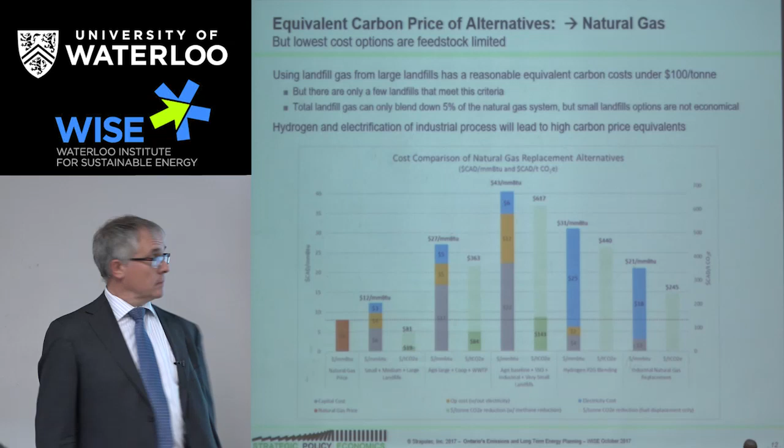Going up with the consumption of natural gas on the medium term. Every project comes with certain inertia—it takes time to do it, to implement it, for society as a whole and individuals to wrap their head around it, to use it, pay it off, and then move on to something else. So when we go past 2030, based on projections you've made, do you believe we will create a lot of inertia around the integration of natural gas systems that will hinder us from going further towards 80%, towards 2050, when we may have to think about natural gas as a significant component as well?

So how long before you don't need the natural gas system, right? The thing that came into my mind was Energy East—it's got canned. For the last year, after Paris came out, I've been wondering to myself, why build it? Because it's got a limited life. Can you build a pipeline and make it economic in 20 years where you're not going to have full capacity? So if you believe Paris, I was surprised they kept pushing that Energy East thing.

In Ontario, we've got existing natural gas infrastructure. It's there. Why they're expanding it to other communities is a good question, because they might get stranded. On the other hand, in order to protect those peaks and integrate the natural gas system with electricity to avoid building electricity infrastructure, maybe it's a good idea to have everybody access to a little bit of gas. So those are the little trade-offs.

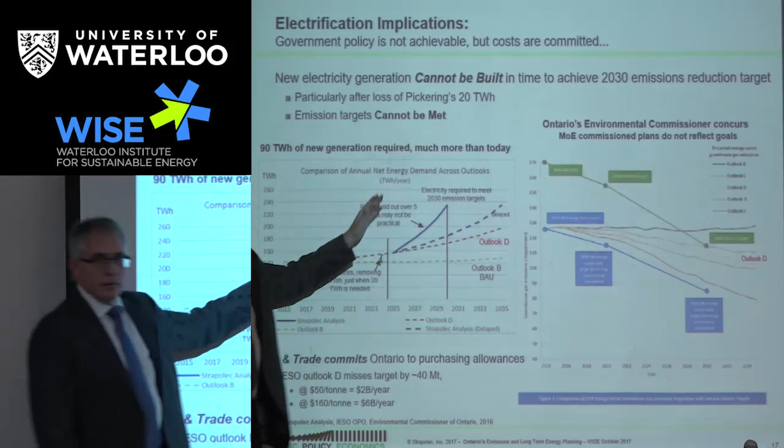On the broader picture: 2030 targets, right? The energy we came up with is you need this much—there's a curve here. 2050 is twice as hard, and it's only 20 years later. So if you think about 2050, there's a big challenge out past 2030 to get to 2050. So the issues, what our mechanisms are going to be, and what the role of all the different options is—it's only going to get more complex once you buy into trying to get rid of the emissions.

In Ontario, the issue is heating is the tough one. Trucks is a global issue; heating's an Ontario issue, not a Quebec issue. So shouldn't we be planning for 2050? I think so—you've got to be thinking about that, because the assets are 30, 40-year assets when you're building large-scale electricity. But that's beyond the view of governments—they have a shorter-term view on life, so I don't know what's going on with that. Now, to their credit, the City of Toronto has their 2040 vision, so they've thought out that far.